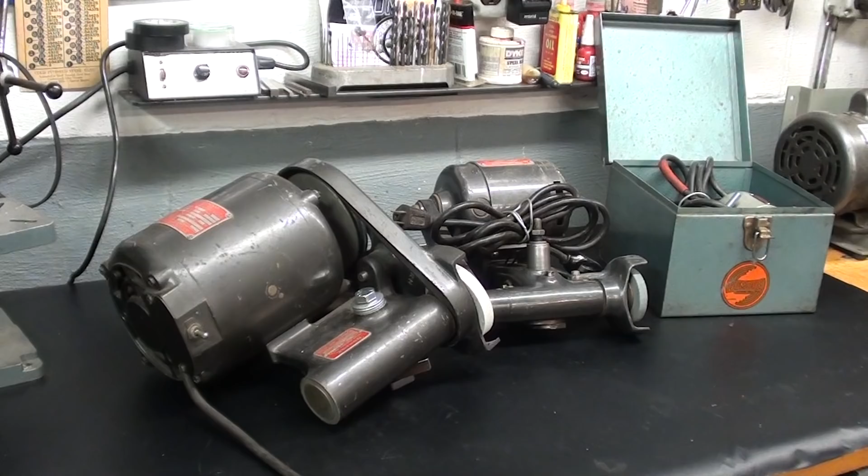I'm down in the basement shop now, and I'm going to spend about 10 minutes talking about 5 or 6 different grinders that I have. And now if this doesn't interest you, you can advance to the meat of the subject here, where I actually do the grinding here in a few minutes. I'll try to put something on the screen as to what the time mark is, but let's talk about these different Dumore grinders.

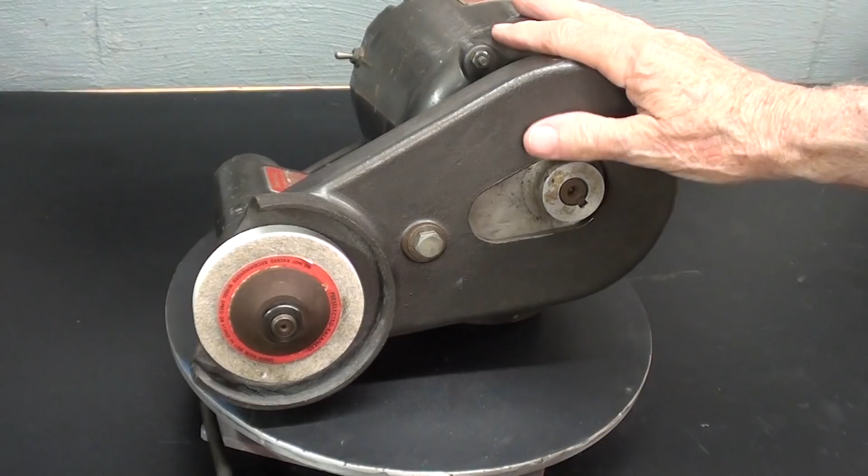Dumore grinders are, of course, the premier name in tool post type grinders, and they make other products as well. You can't even consider buying one of these new. I don't think you could touch it for $1,000, so if you need one, just have to watch for used ones. Now, this is my largest one, and it takes a 4-inch wheel, and that's the one that I'll be using in this video. This is about 40 years old.

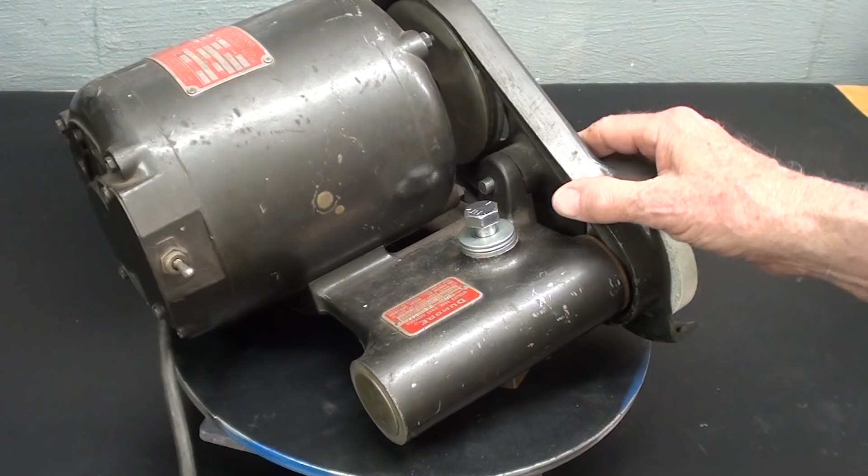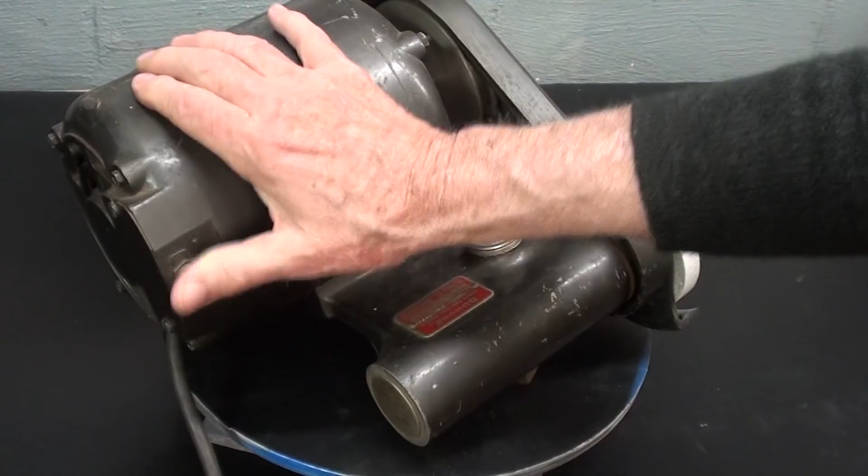They're all pretty old, but it does have a belt guard on them. Some of them do not have belt guards. It has a spindle here that's all sealed, so there are bearings in there, and the dust can't get to them. It is an open motor, which would allow grit in there, and then we got a switch right here. Now I'll zero in and give you a close-up of this. It is a 1/4 horse motor. It is a little bit on the bulky side. These were made in Racine, Wisconsin.

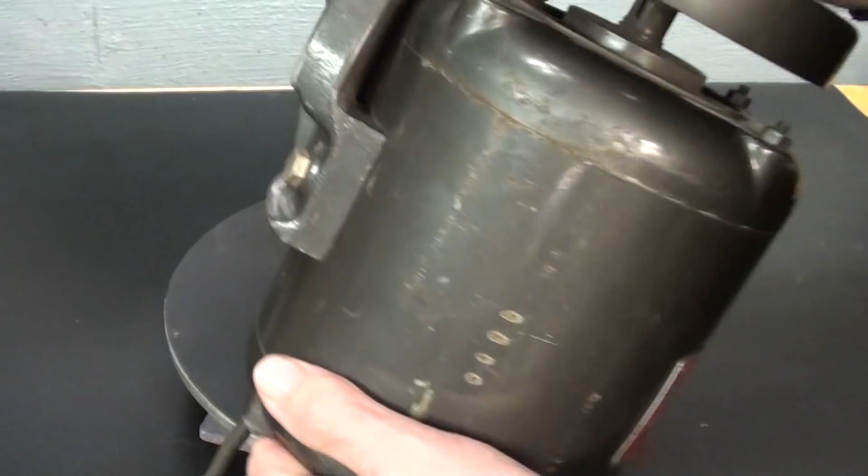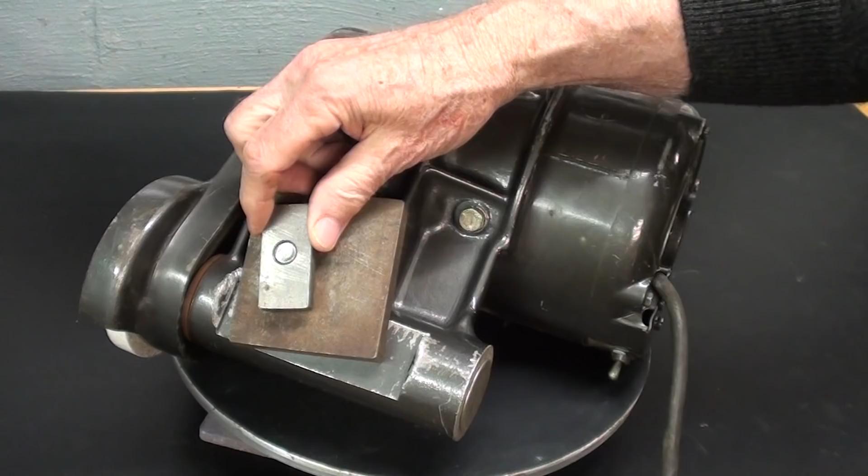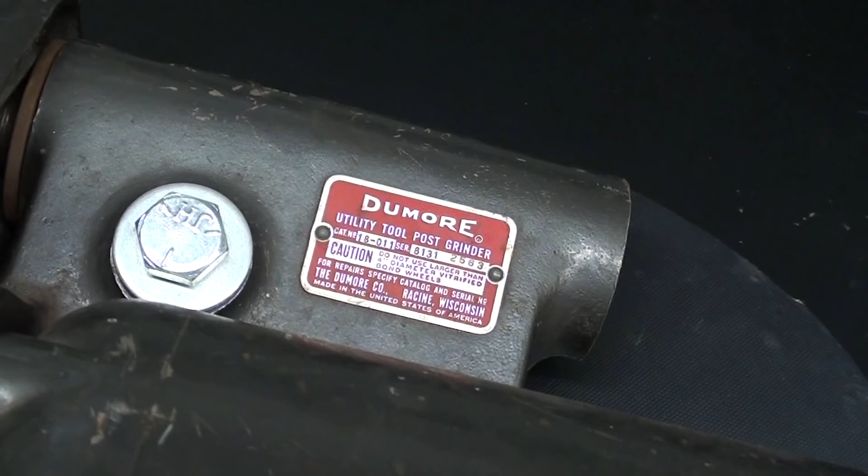And looking at the bottom, you can see that I had to make the nut here that goes into the compound, and this is a spacer that I also made that brings the grinding wheel up to the center of the lathe spindle. That is, it elevates it, and this one is not adjustable other than with shims. Now the other ones that I am going to show you are adjustable. And this is the model number of the big grinder.

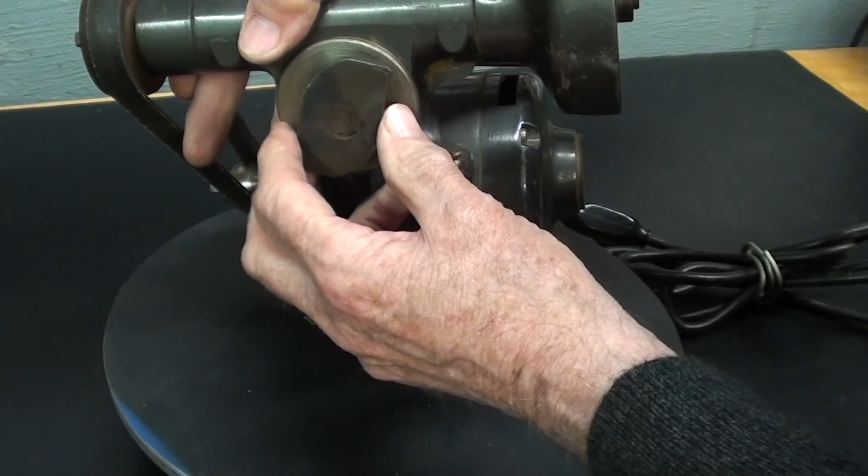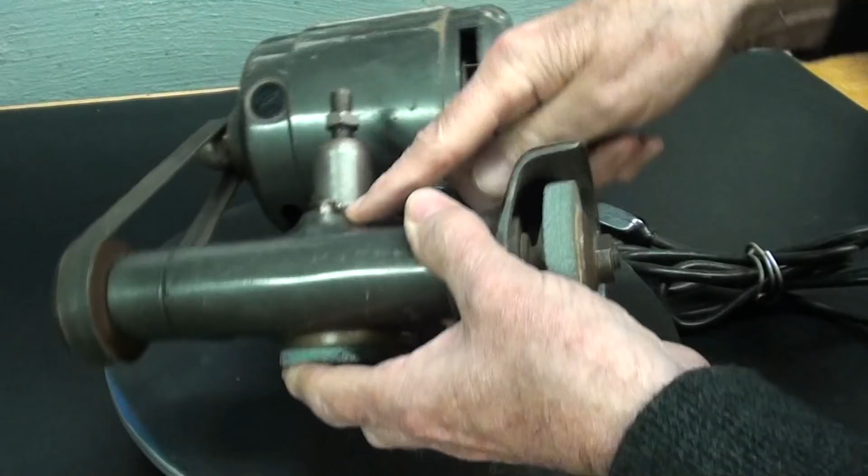Now, looking at the bottom, I like this type of nut. It's more of a universal nut that will fit into different compound sizes, you know, on different lathes. So that's a nice feature. This one can also be raised and lowered to adjust the height of it by loosening this bolt right here, and it can raise and lower on this. And there's a place to oil the spindle.

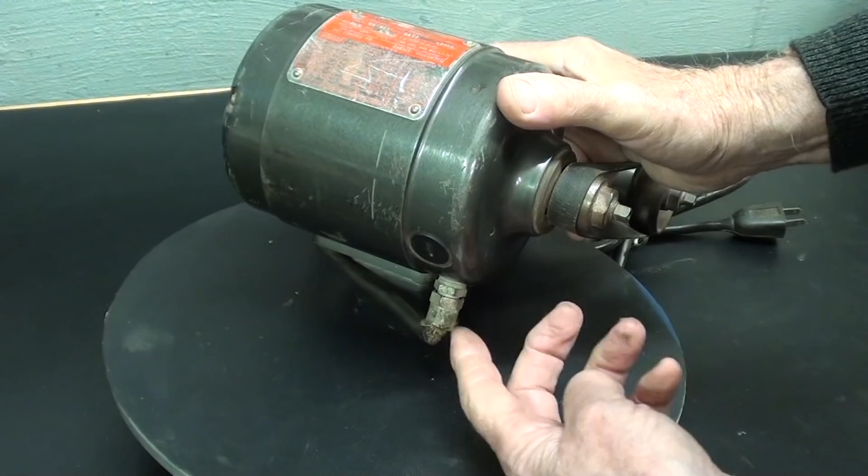And this is also 115 volt. Needs a new cord, as you can see. I'll zero in here and give you a shot of the model number. And there's the model number, and I'm sure Dumore has a website if you want to look it up.

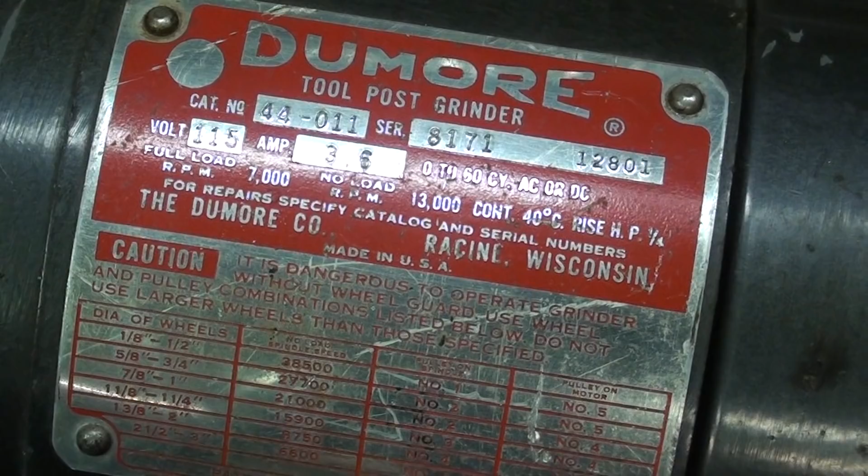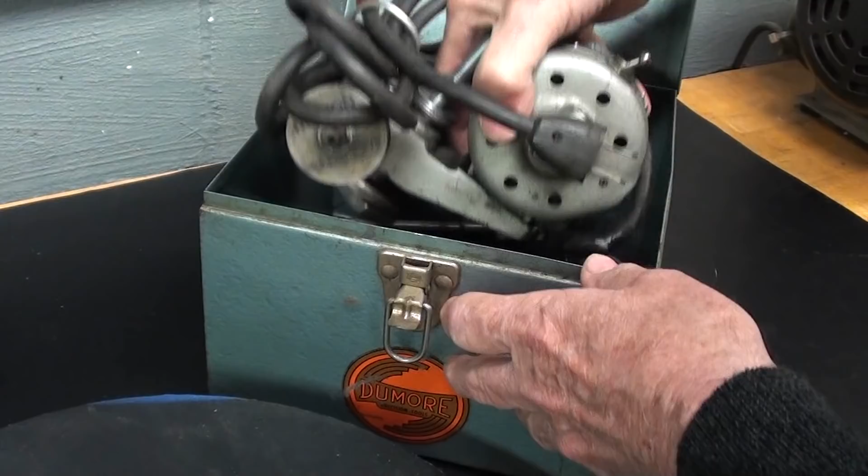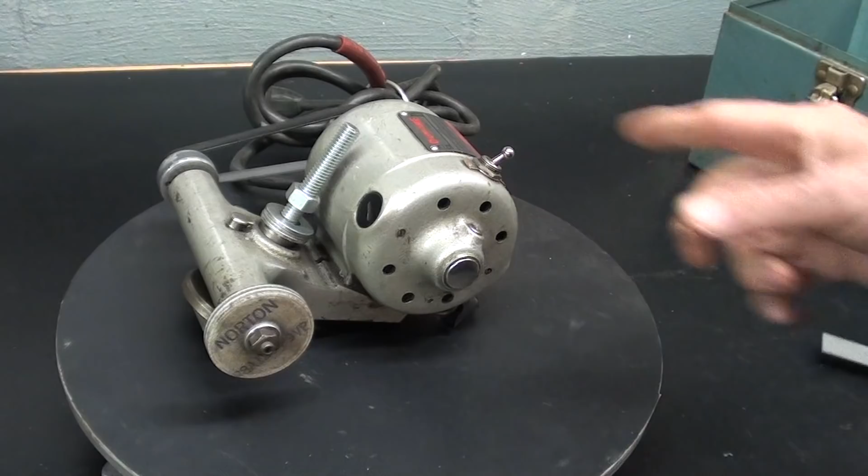This one came in a metal case, and it's appropriately called the Tom Thumb. No guards at all, and it does take a 2-inch wheel. This one is worn a bit, so that would be the size, although this wheel is pretty well ruined. Switch right on here, and by the way, the previous one had an inline switch on the cord. Oilers, also adjustable in height.

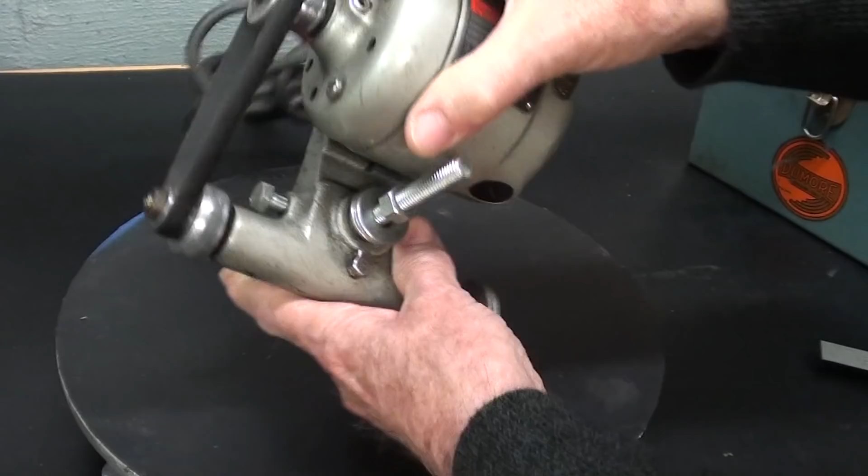That bolt is the locking bolt, and that T-nut I believe is made for the Atlas lathe. So this is just great for real small centers. Also needs a new cord, I think. It's been taped. Brush type motor.

And even these little ones are very expensive. Remember, these grinders can be used for cylindrical grinding, not just center grinding. Of course, grinding lathe centers is cylindrical grinding, but at an angle. Also a flat belt. Now I've got some accessories. Let me show you the accessories.

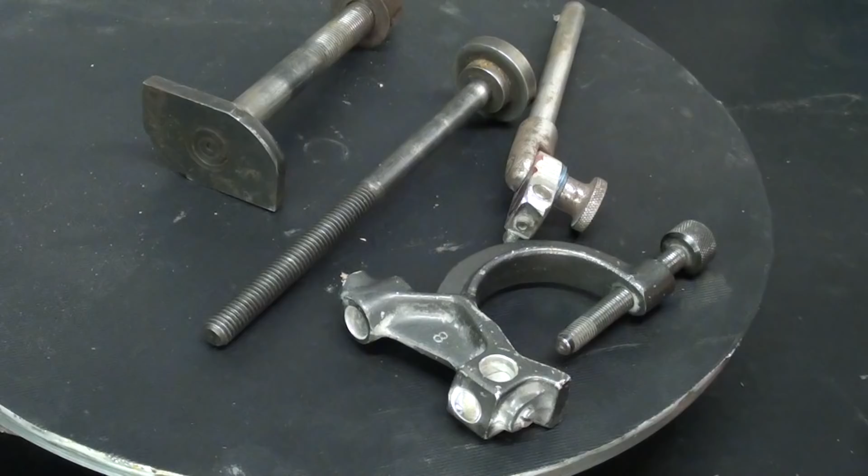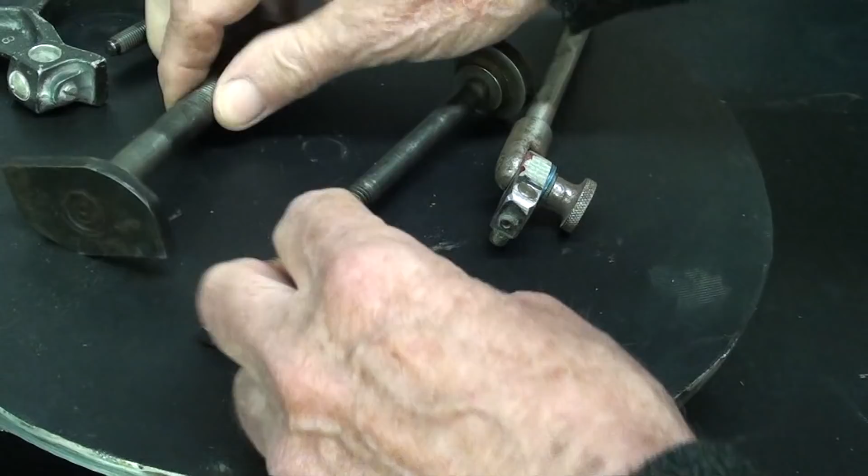This is a genuine Dumore wheel dresser, and the diamond nib can be mounted in the position that you see it here, or crossways, or over here, and that is a V-block there that can be clamped right onto the work. Feels like it's aluminum, and here's some different bolts that would bolt down into the compound, different designs.

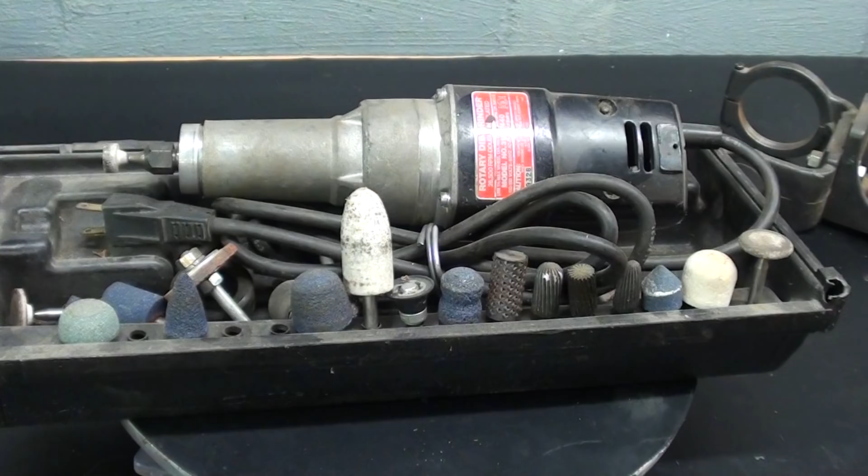Here is a diamond dresser that I sometimes use that can be held in the 3-jaw chuck, and then this can be set at different angles. That's the diamond. This is a Sears Craftsman grinder. They call it a rotary die grinder, but it can be used for very light duty tool post grinding, and I have all kinds of nibs here.

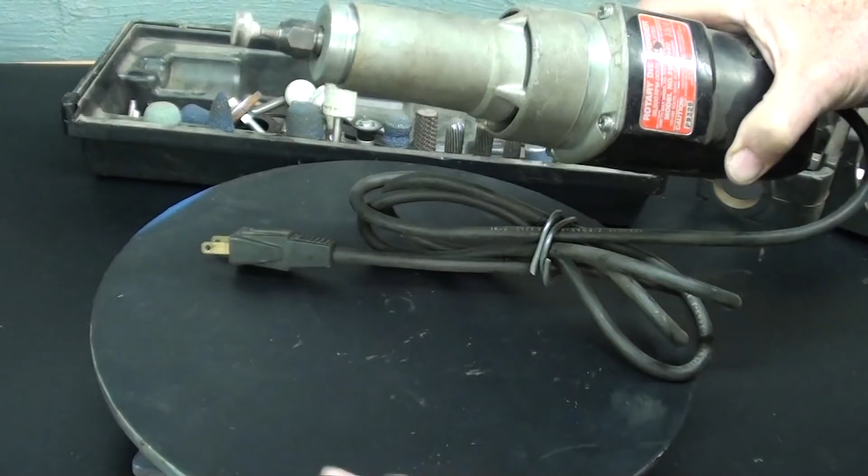I'm not a big fan of these by any means, but in addition to just offhand work in your shop in the vise, you may use the attachment that I'm going to show you here. And this attachment almost looks like it's been made by Dumore and sold through Craftsman, because it is that hammer tone black or gray color that is used by Dumore. Okay, and here's how it works.

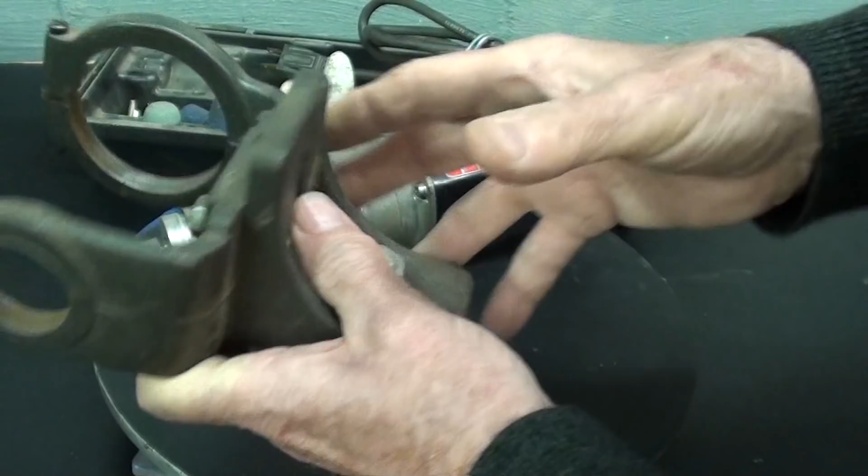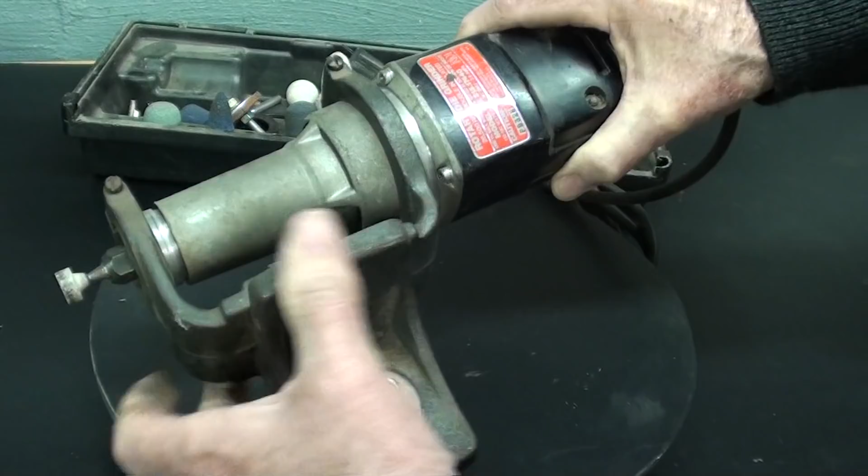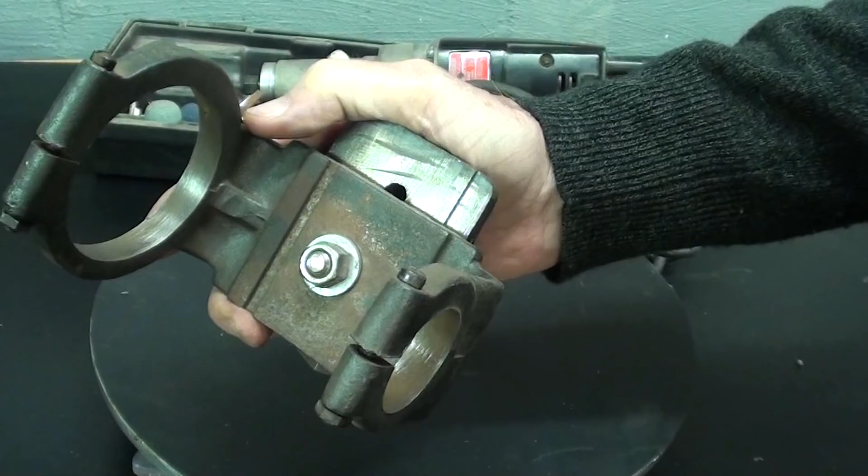This surface here and here hold the grinder, and of course you would tighten the screws, and then this would go into the tool post, I should say the compound. There's a T-nut that I made some time ago, and this can be raised and lowered, and is really quite well made. It's cast iron. As you can see, it's keyed, so it will raise and lower and be locked in the vertical position with some accuracy.

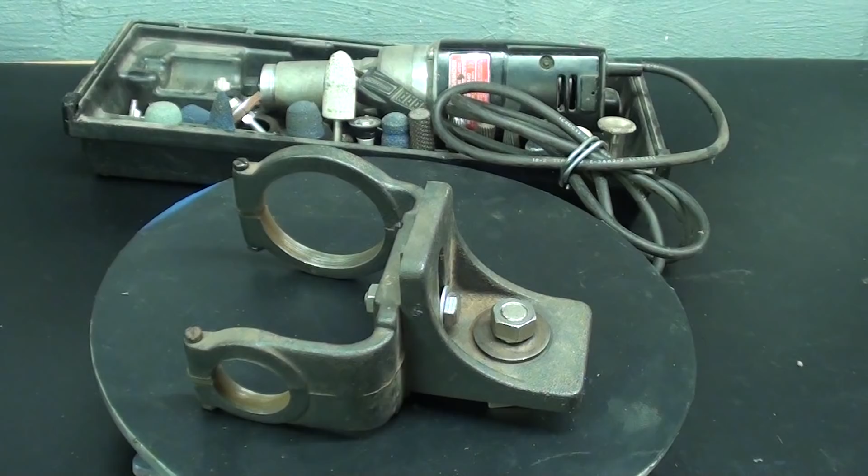And also they bill this in the catalog as being a holder for the grinder, and you could hold this in your bench vise to do various handwork where you would move your work up against the grinding wheel. Now let me show you a 1966 Sears Craftsman catalog where they sell this stuff.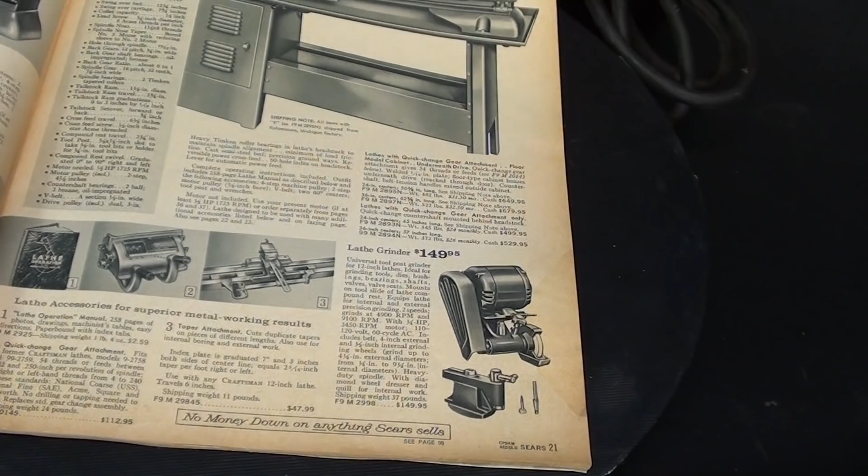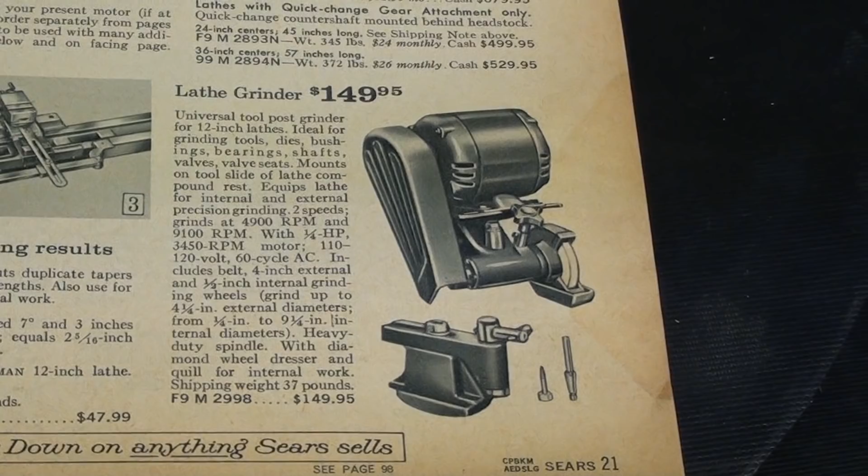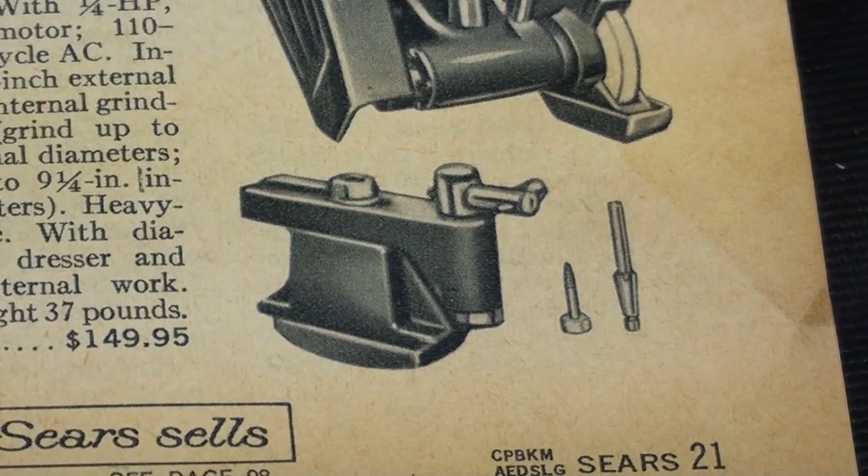1966, I was a mere boy, and on the page where they sell the Craftsman lathes, and that's basically the lathe that I have right here, not the one I'm going to use in the demonstration, but the one here in the shop, they sold for $150 a tool post grinder, and then you also could buy the diamond holder that would clamp right onto the bed of the lathe. I do not have that, and I know that this is an Atlas brand, and it's shown in the Atlas catalog as well.

And on another page, an older version of the grinder that I just showed you, but there is what they call the bench stand and holder, and that was $8. So that is what I just showed you, and I'm sure it's not available anymore.

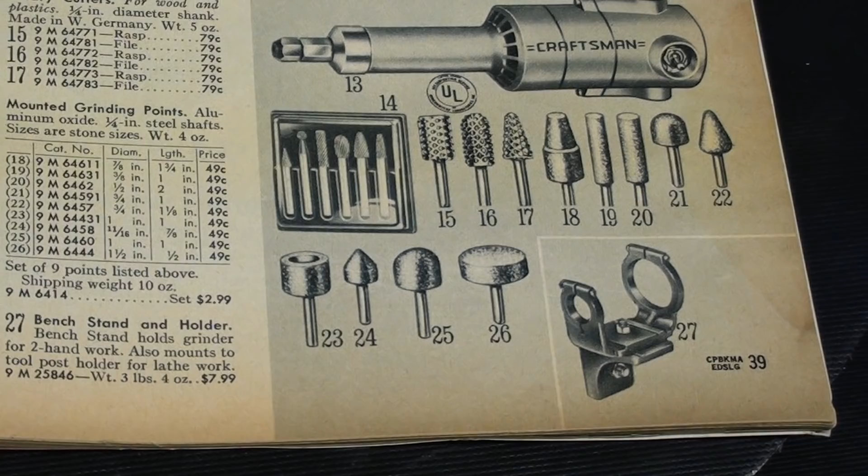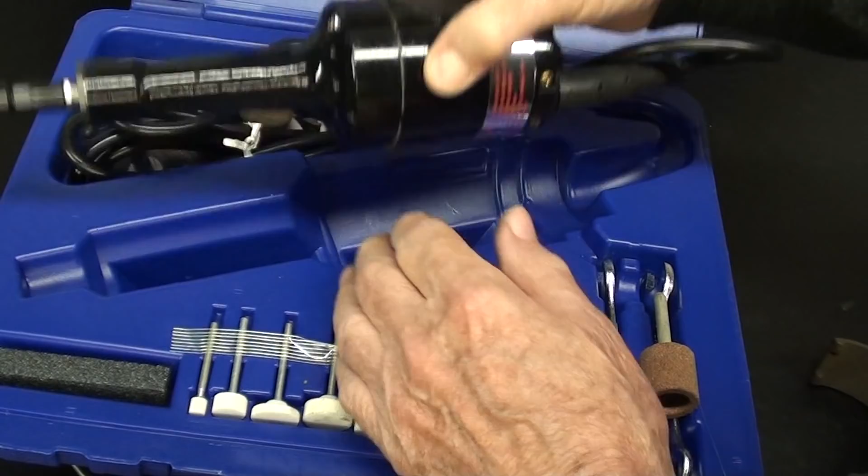And finally, the Dumore hand grinder, and this was given to me by the Dumore company. You've seen it in other videos. Ta-da! And this is virtually brand new, and these are expensive. This is probably $300 or $400. You got the switch right there. That's an improvement, a little guard here so you don't inadvertently turn it on, I guess.

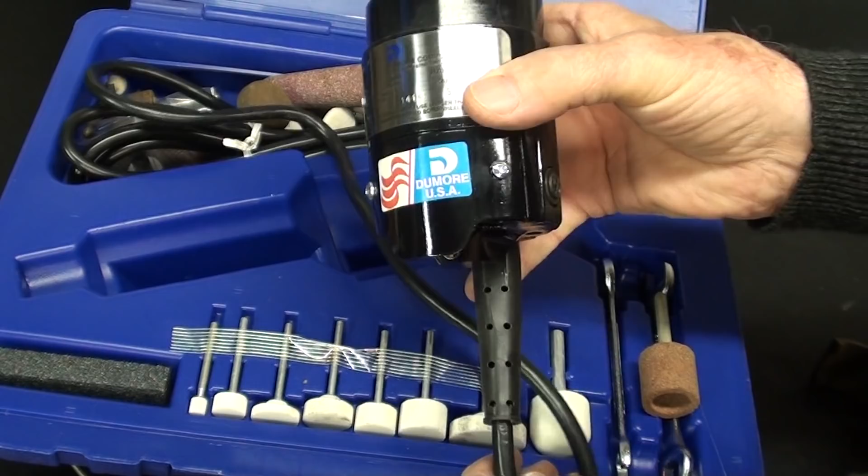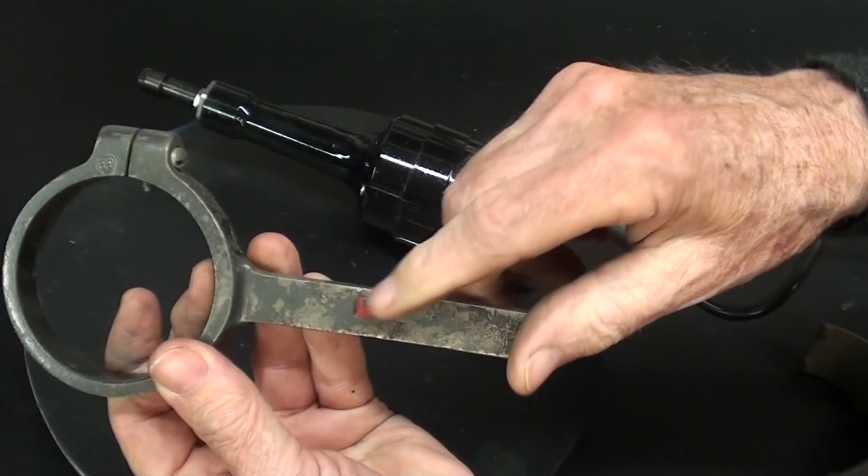Well, why is he showing us a hand grinder, you say? Well, this can be used as a tool post grinder for small work of sorts. And how would that be accomplished? Well, I have this Dumore, and I still got the Dumore decal on here. I've had this since time immemorial, and this will clamp around the grinder in a manner like that.

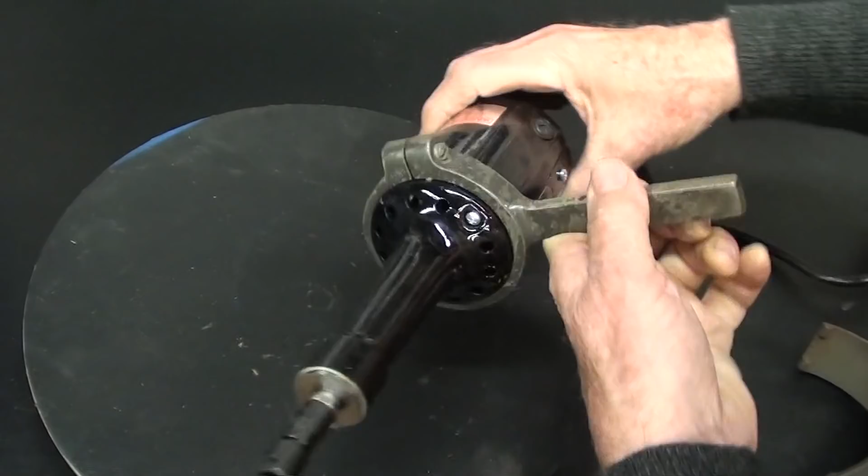You tighten the screw, of course, and this can be held in your lathe tool post like that, and you could do relatively light grinding. You could do internal grinding as well, but that is the purpose of that. And let me show you another take on that. This is rather small in size, and you wonder how rigid it could be.

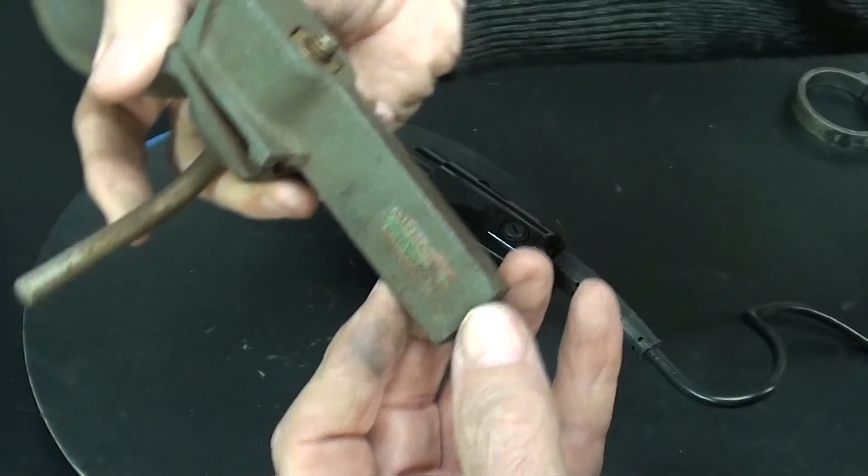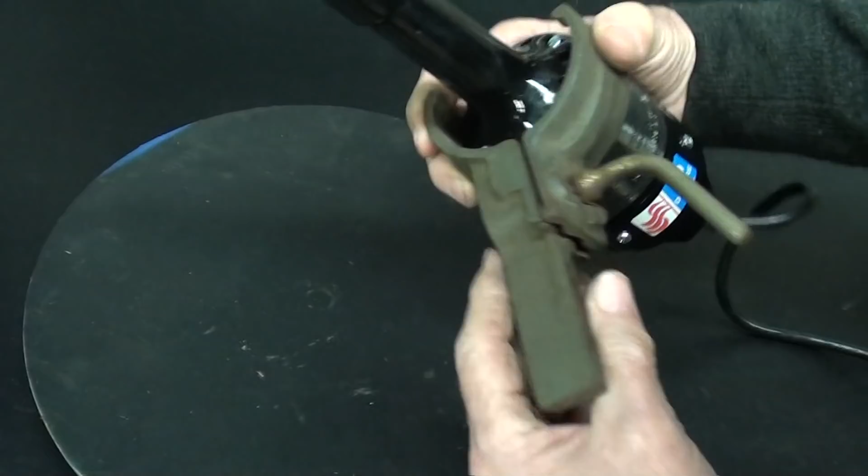So this one, also made by Dumore, there's the original decalomania, and this will clamp in a similar manner, only it's a clamp, and then can be held in the lantern tool post on your lathe, whatever size it is.

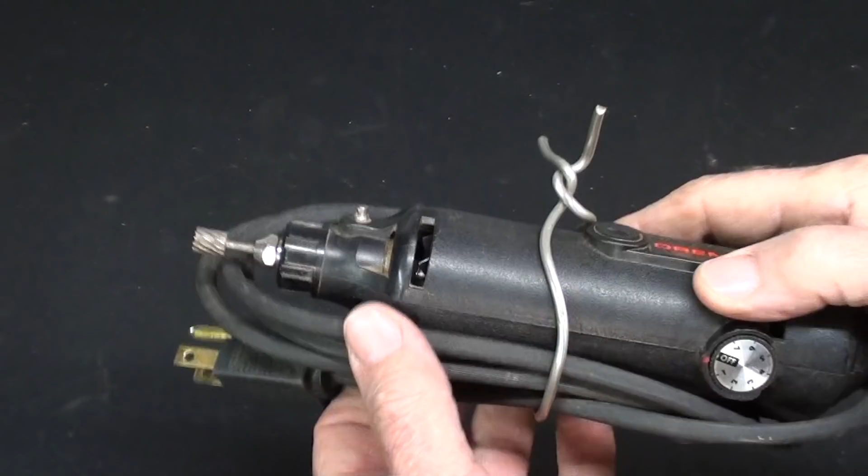Now, Dremel type grinders are sometimes used as tool post grinders, never by me, but I've seen in videos where people have made a holder that would fit onto the compound, and some of the holders are even made of wood. How effective, how rigid that is, how worthwhile, I do not know, but possibly for model making or very small work with a grind wheel, not a rotary burr, it may have some merit, some value. I do not know. I have never tried it.

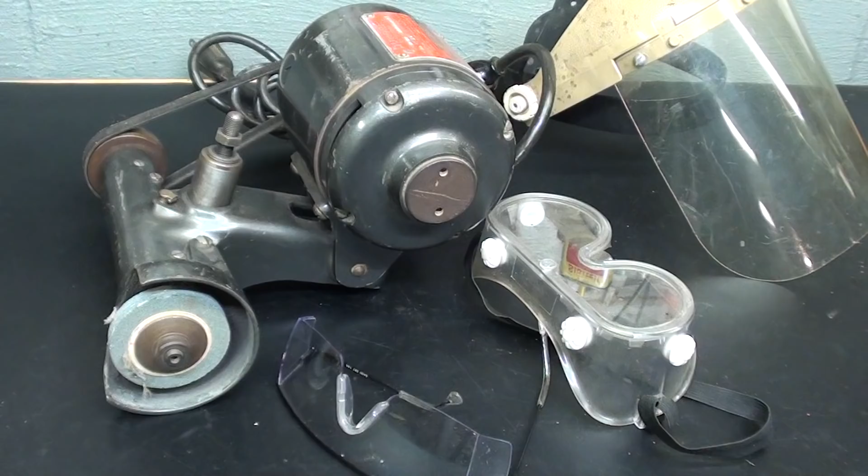So that is the extent here of the grinders that I have. I hope you enjoyed this little part. I think I'll talk a little bit about safety before I go out to the garage and start the grinding, but you know, I'm always leery of any grinder, of sparks and of a wheel exploding, so make sure you wear glasses, goggles, a face shield.

Generally I like both, maybe glasses as well as a full face shield when I'm grinding, so protect your eyes at all costs. There may be a need sometimes to wear a respirator for the dust, although in this particular video and lately I have been using the shop vac to pick up the sparks and most of the grinding dust, and it seems to be quite effective, although the extra noise is annoying.

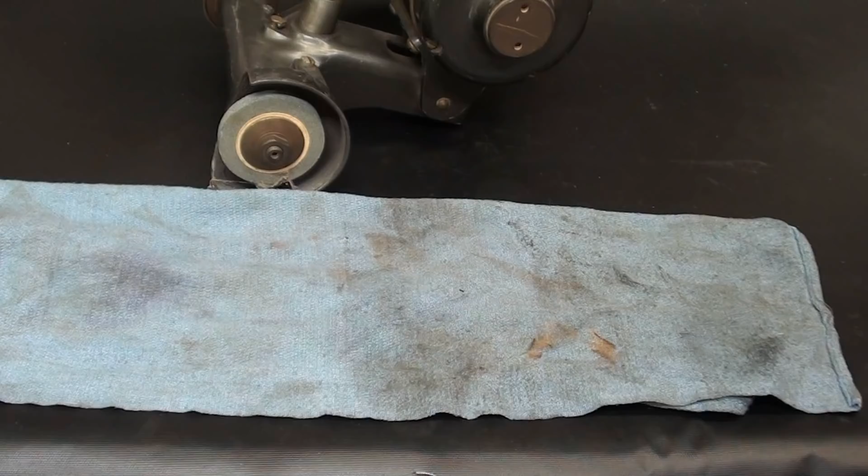Also, when you're grinding on the lathe, you need to protect the machine itself, the ways and the screws and just all of the parts from the grinding dust and the grit and the swarf, which is so damaging to any moving parts. So I like to drape the machine in towels or rags or whatever to prevent that, and then throw the rags away because that swarf is embedded in them. You don't want to wipe the machine with that.

And there's always the danger of fire with sparks hitting the rags, so you need to dampen the rags. And then when you're done, you need to remove the moisture away from the lathe bed, and then re-oil everything. Clean it, wipe it again, and oil it to prevent damage to the machine from grinding.

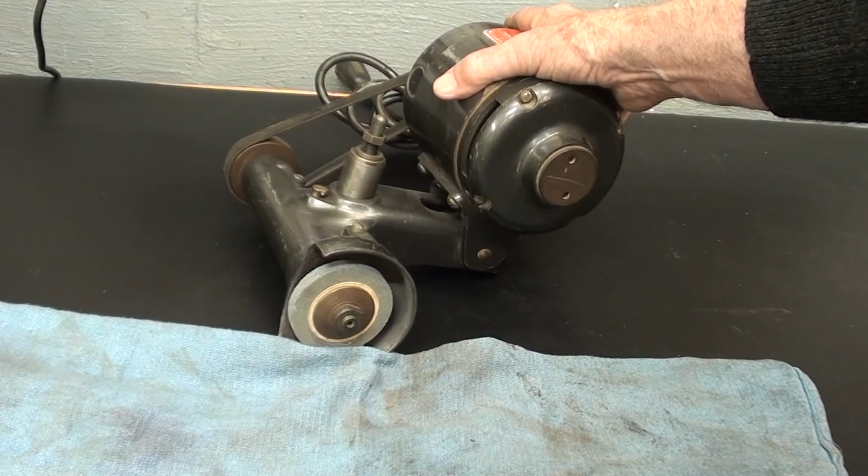And some people will not grind on their lathes at all because of the damage, or they might have machines that are dedicated exclusively to grinding, and sometimes in rooms that are strictly for grinding and keeping the dust away from the other precision machines. So consider all of that when you're grinding on your lathe. Alright, now we are going to go out to the garage.

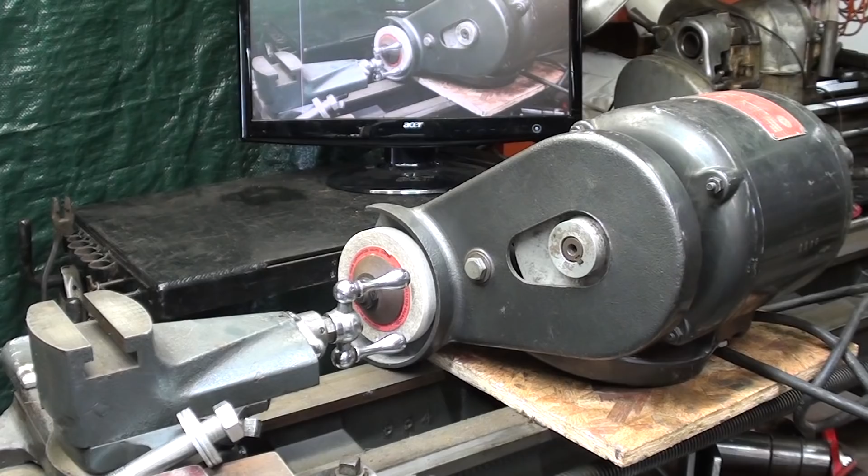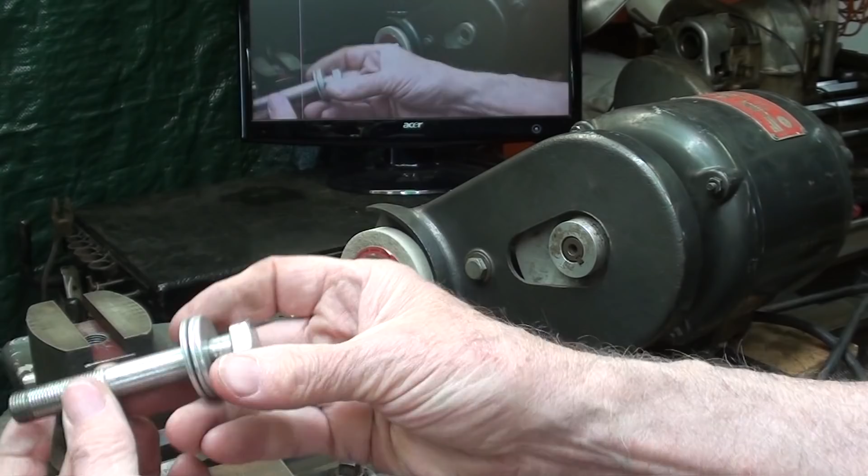We're finally out in the garage shop and we're ready to do some grinding. So the first thing I will do is to mount the Dumore grinder onto the lathe compound. Again, this is the Atlas Craftsman lathe, 12-inch. But the very first thing I want to do before I mount it, and this is again the T-nut, that's a 1/2-inch fine bolt, and this is the spacer that I drilled and cut specifically to the size that it would raise the shaft in the grinder exactly the same height as center height on the lathe.

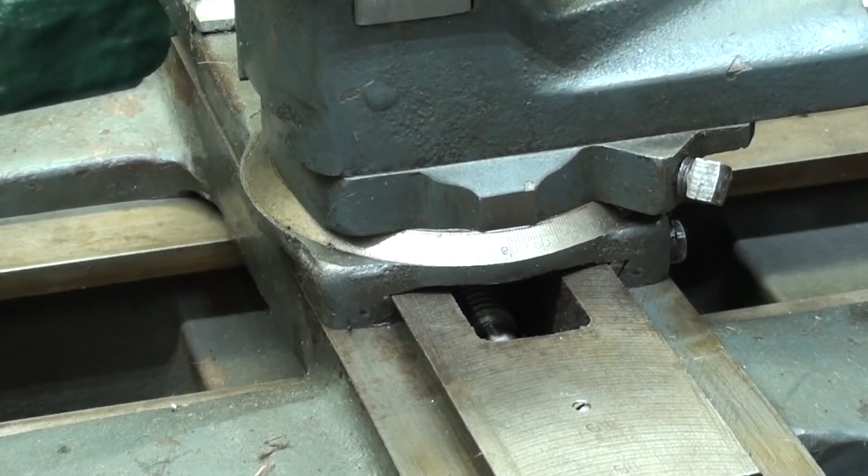Okay, and now I want to mount this, but I have set the compound temporarily at exactly 90 degrees. You'll see why in a minute. And a lot of this is a repeat from the previous video because I cannot be sure that everybody watched that. For the past 40 years, I've always set the angle of the grinder by guess and by golly. That is, trying to line up the axis of the spindle with the axis of the machine. And they really need to be right on. And then I will set the compound for 30 degrees. Well, how am I going to do that? And this is how I did it, well, similarly in the last video.

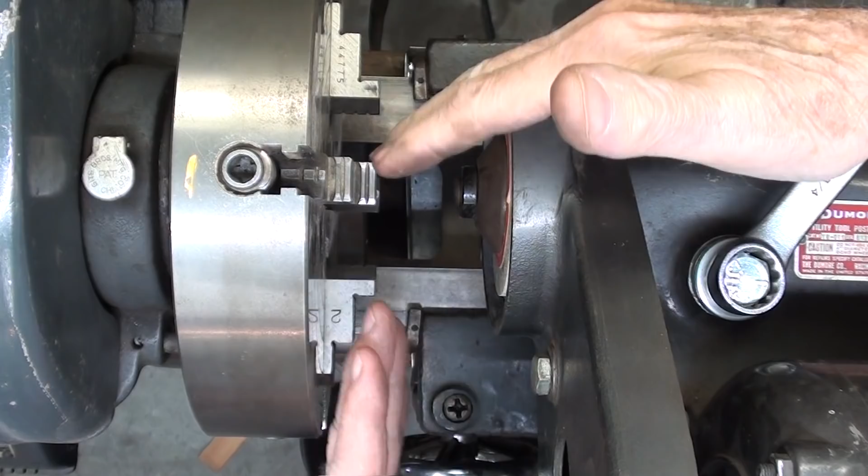But I'm going to put a 4-jaw chuck on the spindle right now and essentially line up the face of the wheel with the chuck. I have adjusted the jaws on the chuck so that they are all equidistant out and are slightly larger than not just the washer here, but the blotter. I don't want the jaws right here to touch the blotter. I want them to touch the actual grit of the grinding wheel.

So now I will move this in, move the whole carriage in, and I can move it back and forth like that until I get it squared up. And some of that is by feel. And that's pretty darn accurate. And I know the guard is in the way. I wish it wasn't, but now I will tighten down this bolt and lock the Dumore into position. And now I will set the compound angle for 30 degrees.

Now the compound along with the grinder is set at 30 degrees, and I have to use a flashlight for that because it's kind of dark down there and you're not going to be able to see that, nor do you need to, I believe, but it's setting the compound the same as you would to turn a taper by the compound rest method, because that is in fact what we are doing. And off comes the chuck. I should have a board under there, but there's not room for a board right now. And then I'll put a thread protector on there to keep the grit off of the thread.

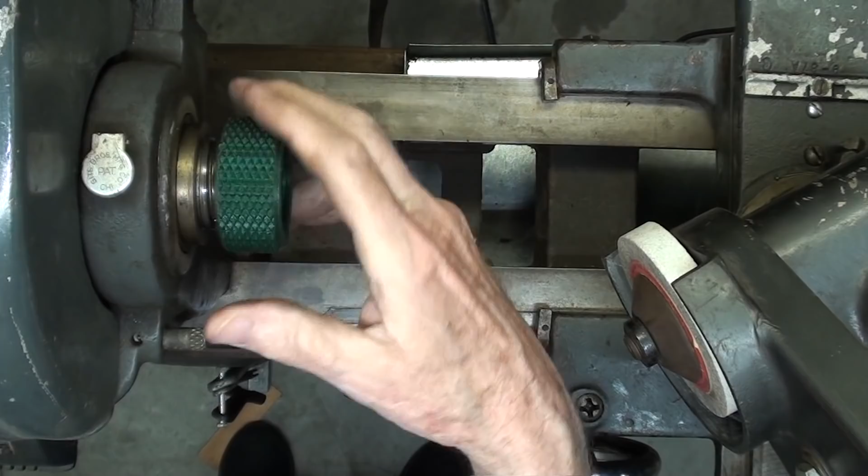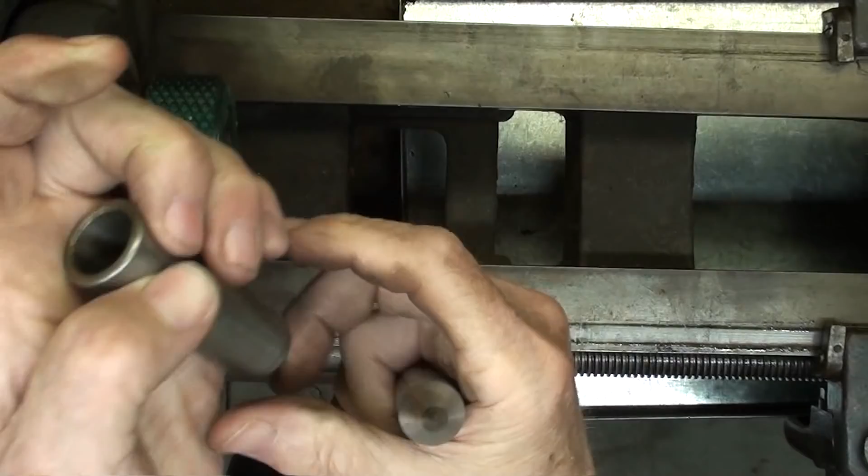This is the center that I will be grinding, and it's not real bad, but there's a little bit of a notch right there. So when you install the center, make sure that the spindle hole is clean and wipe the center and the sleeve both inside and out. You don't want any grit or any burrs or anything that will interfere with the alignment of that. And I will tap it with a soft hammer.

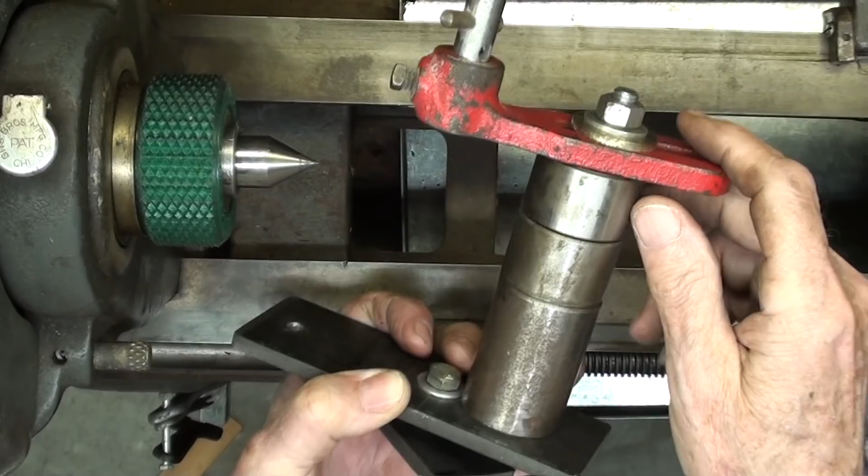Now this is my wheel dresser, or I should say my diamond. Now you may recognize this red part. That was in that Sears catalog, wasn't it? But not the lower part. This is just all made up of various pieces that I came up with.

These are actually collars off of the milling machine that give me the right height. Also, I get my final height adjustment here because I want the height of the diamond nib to be the height of the spindle on the grinder, and this will clamp right to the bed and it will be very rigid, and the nib comes approximately perpendicular to the face of the wheel, or the periphery of the wheel.

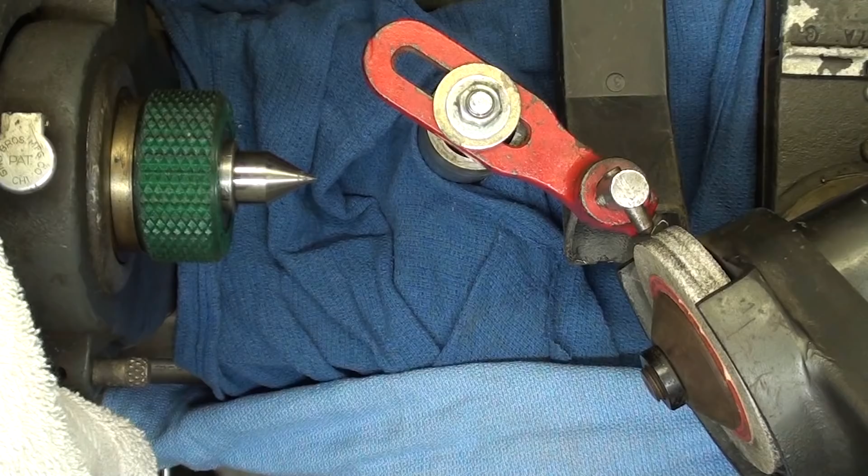All right, I've done several things here. This is the spout of the shop vac. This is a wet towel here covering the bed, and here's a dry towel that's extending over onto the cross slide to protect it. And if you want to use some of your wife's towels to cover some other things, I think that this vacuum will pick up most of the dust, but I really don't like that grit all over the place like I told you before. So protect whatever you think you need to that won't get caught in the wheel.

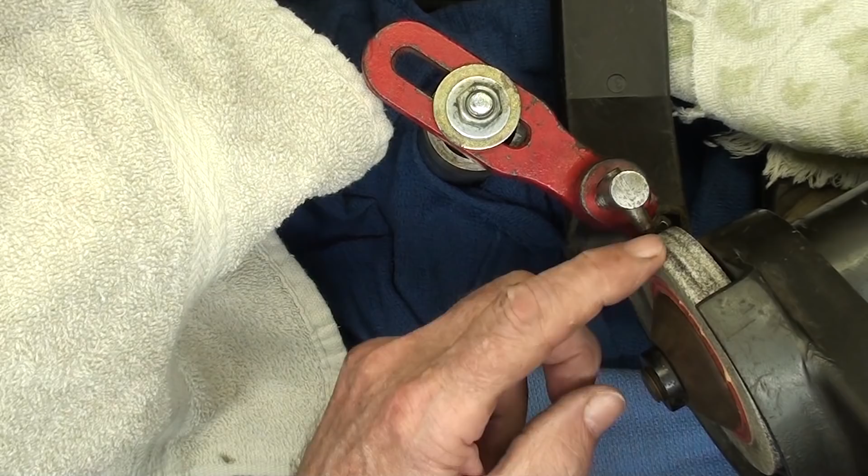Now I have, again, set this for 30 degrees compound, and I've locked the carriage. I put a little black on the wheel, so maybe it'll show up. And I think you recall that several things are being done to the wheel. We're sharpening it, we're squaring it off, and we're bringing it into exact compliance with that 30-degree angle, because I may be a half degree off, I'm not sure. I tried to get it as close as I can, but I will start the grinder, not the spindle of the lathe at this time, and just run the diamond across the wheel, or should I say the wheel across the diamond.

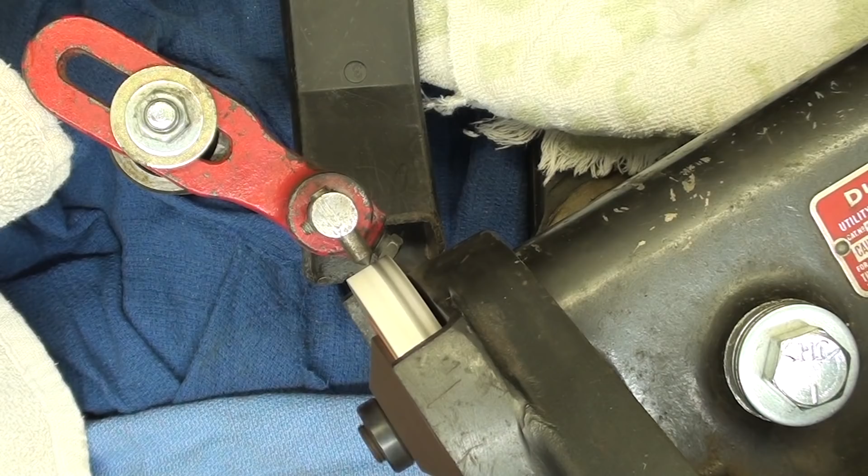Everything that I'm doing here can be done much more quickly than it seems because I'm talking about it. But now what I'll do is remove the drapes and take the wheel dresser, the diamond, off of there, and then move the whole carriage up close to the center, the dead center. Remember also that I have to run the lathe spindle in reverse, probably at about 400 RPM. I will be wearing my face shield.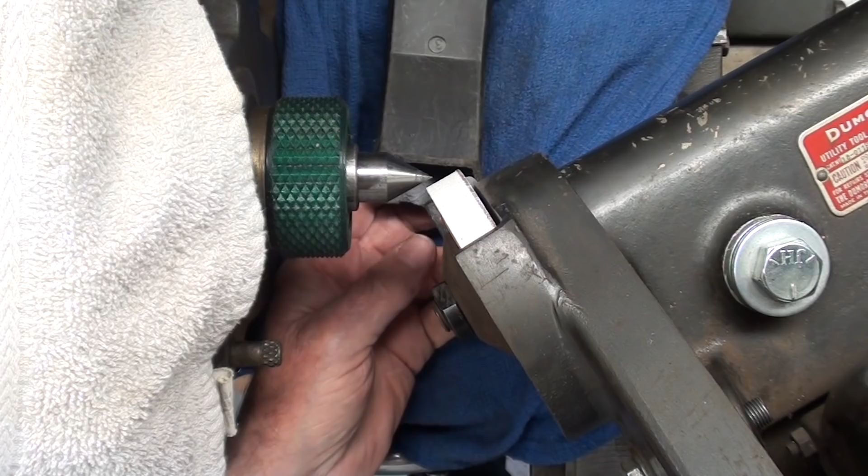Again, the drapes have been moved, and even the pickup here has been moved over a little bit. And the hose is supported on a stand that's out of sight, but by moving the carriage up, the feeding for depth of cut, of course, is done with the cross feed, and the lateral movement with the compound. I think I'll put a little Sharpie on the tip here so you can see what's going to happen, because it's not going to take very much to clean that up.

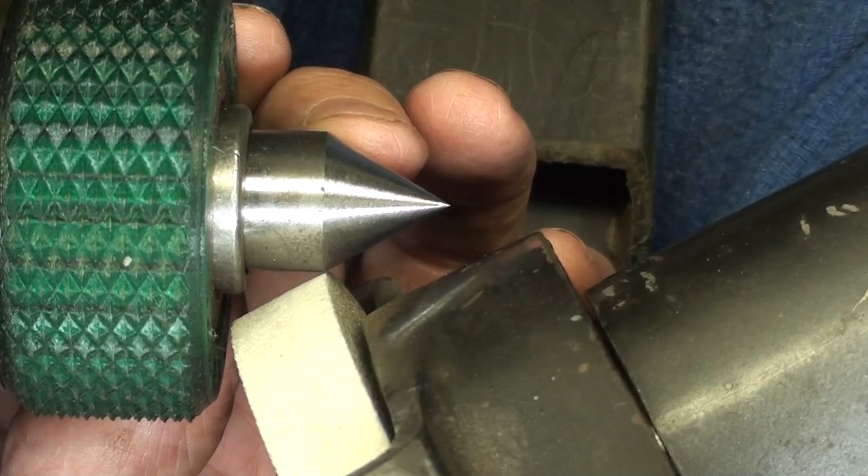You see, that didn't take very long or very much grinding to true that up, sharpen it. We don't need it all that sharp. I'll probably run a stone across there so I don't scratch myself. Now check clearances that you don't strike anything. Take a dry run before you turn your grinder or your machine on, as always, because you see I'm pretty close to the thread protector there.

Back the carriage away. And you can see there's almost no grit on here, either from the grinding wheel or the sparks, and certainly no danger of fire. So the vacuum, which I've never used until recently, really does a good job of taking that away. Matter of fact, right here, can you see the amount of swarf that's embedded itself into the plastic?

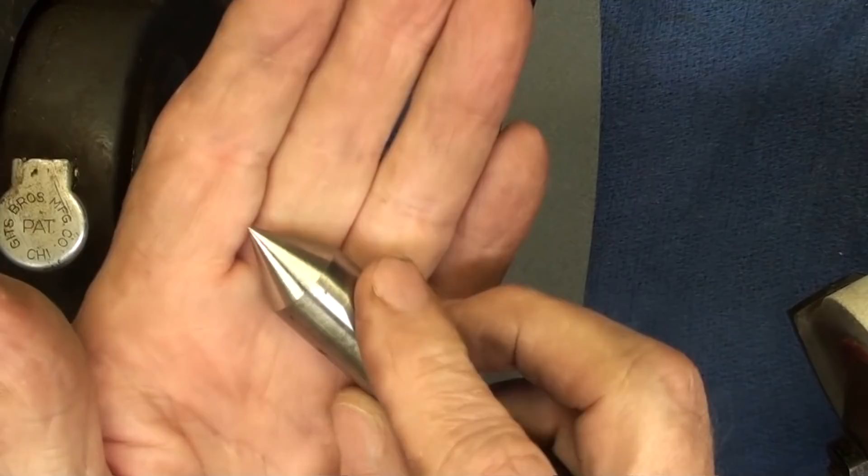As I said, this is such a sharp point, I like to take a stone and just dull it a little bit. A file probably will not do. Already that's better. So it's not so lethal. And there's the center. Looks very good. 60 degrees, of course. All right, looks like a perfect fit at 60 degrees, and remember that half of that is 30, so that's why I set the compound for half of it to give it an included angle of 60.

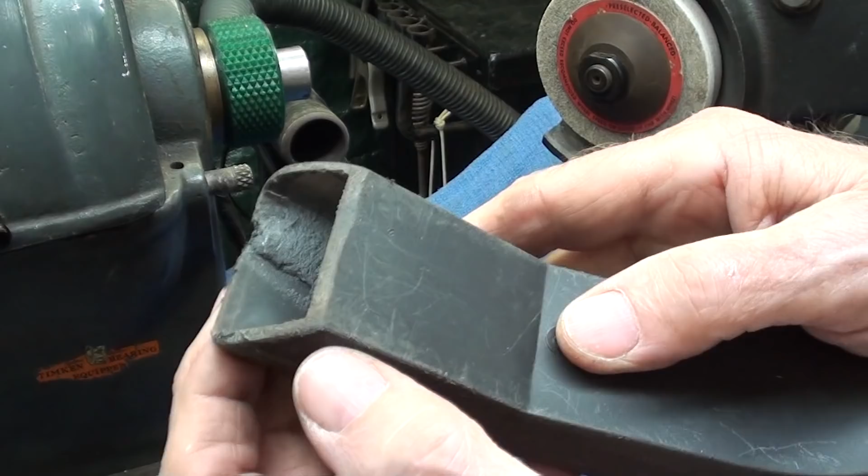Now also take note here in a close-up, that is the grinding swarf and dust. It will not chip off. I tried to get it off because in fact it has burned its way into the plastic, but that much has escaped falling on the lathe or even on the drape, so this is highly effective. Highly effective. I don't know why I didn't do that years ago. People told me about it, or I saw it in other videos.

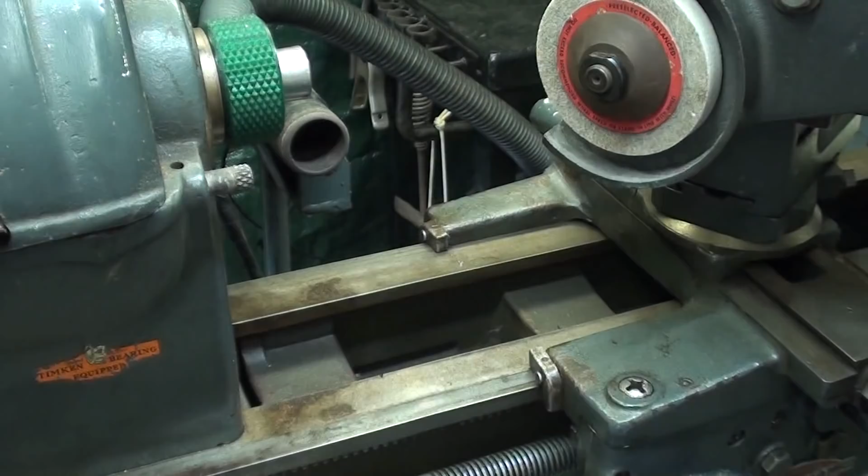Now I have to take the wet cloths off and then put a little oil on here in case of rust.

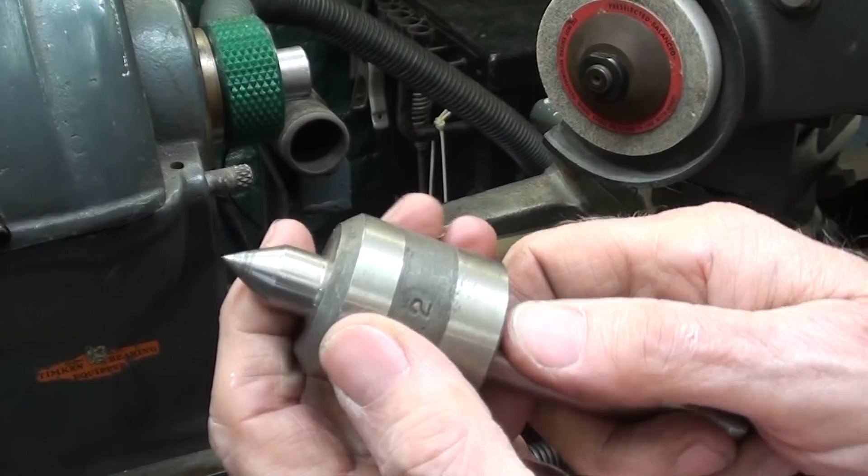Remember that this is a three-part video. The first one was on South Bend, this one was on Atlas Craftsman, and in the next one I am going to attempt to grind a live center, a ball bearing center. This isn't in real bad shape, and it'll be pretty similar to what I have been doing with just a little bit different spin on things.